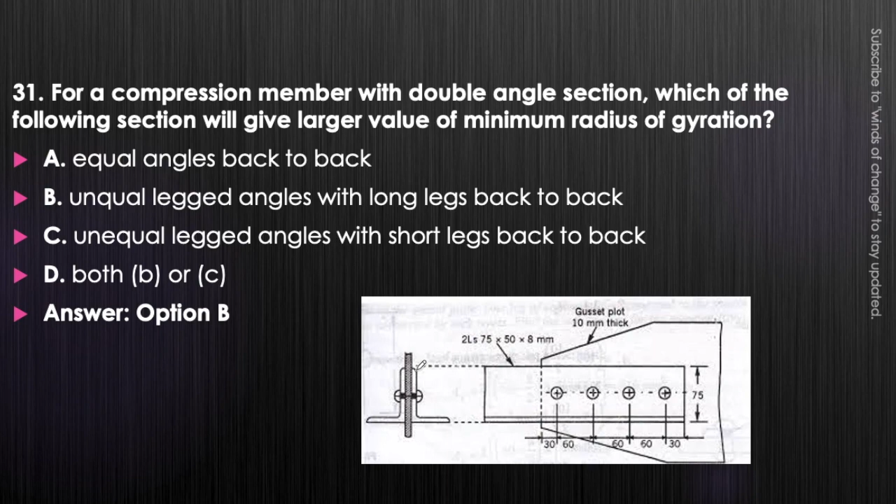The larger value will be obtained for option B, that is unequal legged angle with long legs back to back. The long leg is connected back to back and the shorter leg will be outstanding. So this will produce the larger value of minimum radius of gyration. Radius of gyration is root I by A.

Next question. According to IS specification, the effective length of a column effectively held in position at both ends and restrained in direction at one end is taken as 0.67 L, 0.8 L or 1.5 L. In this condition, one end is effectively held in position as well as restrained in direction. Another end is effectively held in position but not restrained in direction. So the answer will be 0.8 L, that is option B.

These are all the cases. First case, one end is restrained and the other end is free, so that is 2 L. When both ends are effectively held in position but not restrained in direction, it will be L. If one end is effectively held in position and restrained in direction and the other end is like a roller supported condition, then it will be 1.2 L.

In the condition given in the question, both ends are effectively held in position but only one end is restrained in direction, so L effective becomes 0.8 L. When both ends are effectively held in position and restrained in direction, it is given by 0.65 L.

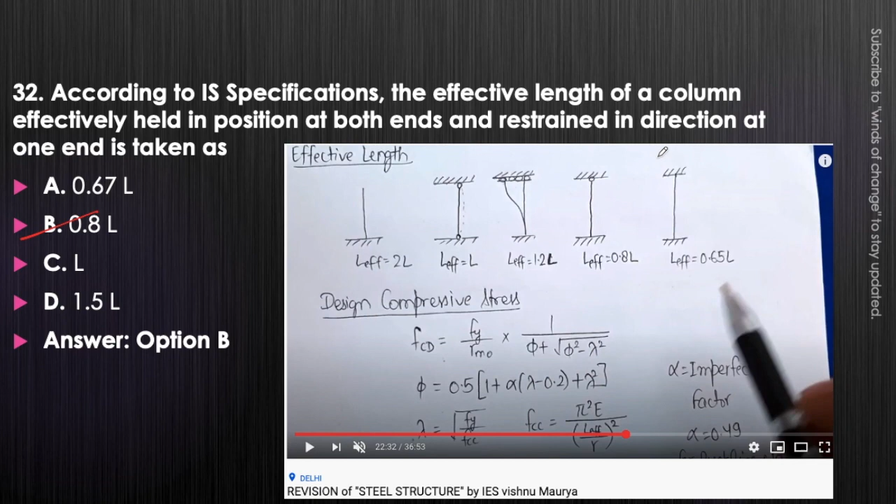Next question. The minimum thickness of the steel plate which is directly exposed to weather and is not accessible for cleaning and repainting should be 4.5 mm, 6 mm, 8 mm or 10 mm. It is directly exposed to weather and not accessible for cleaning and repainting, so we cannot do any treatment after placing it. The minimum thickness should be 8 mm. Option C is the correct answer. Memorize it, it is an important question.

Next question. The elastic strain for steel is about 1 by 12 of the strain at initiation of strain hardening and about 1 by 120 of maximum strain, or 1 by 2 of strain at initiation of strain hardening and about 1 by 12 of the maximum strain, 1 by 12 of the strain at initiation of strain hardening and 1 by 200 of maximum strain, or 1 by 24 of the strain at initiation of strain hardening and about 1 by 200 of the maximum strain. Just think about it.

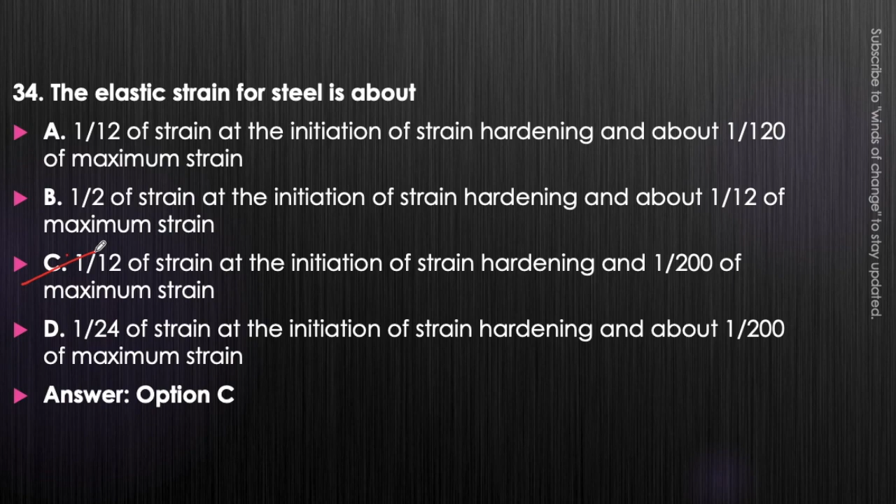The answer will be option C, that is 1 by 12 of the strain at the initiation of strain hardening and 1 by 200 of the maximum strain. This is the elastic strain. This value should be 1 by 12 of the strain at strain hardening. Let's say this is where strain hardening starts and this is the value of maximum strain that will be developed.

So it should be 1 by 12th of this one and 1 by 200th of this one. We are talking about this value of elastic strain. Okay, got the concept here.

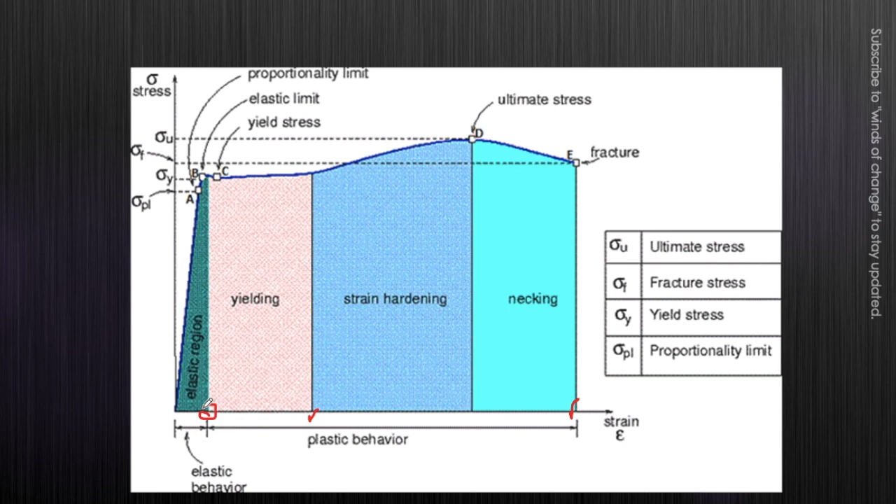Next question. In a gusseted base, when the end of the column is machined for complete bearing on the base plate, then the axial load is assumed to be transferred to the base plate fully by direct bearing, fully through fastening, 50% by direct bearing and 50% through fastening, or 75% by direct bearing and 25% through fastening. Just think about it. We are talking about the gusseted base condition at the end of the column. What will be the answer? Think about it.

Since this is a condition in which the column is machined for complete bearing on the base plate, the axial load is assumed to be transferred to the base plate 50% by direct bearing and 50% through fastening. So answer C will be the correct answer. Okay, in this case 50% load is being transferred by the bearing and 50% by fastening. You can watch here about this condition. This is direct bearing. If this is machined, then 50% load will be transferred directly and 50% by these fastenings.

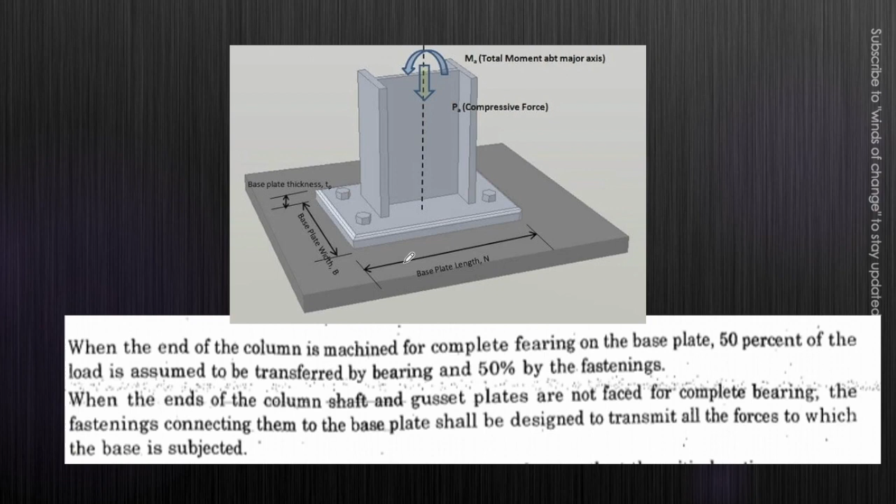Okay, when the ends of the column are machined for complete bearing on the base plate, 50% of the load is assumed to be transferred by bearing, 50% by fastening. Now we will see the other condition also. When the ends of the column shaft and the gusset plate are not faced for complete bearing, the fastenings connecting them to the base plate shall be designed to transmit all the forces to which the base is subjected. If this is not machined, then we will assume that these fastenings will be responsible for taking all the loads.

Next question. Shear buckling of the web in plate girder is prevented by using vertical intermediate stiffener, horizontal stiffener at neutral axis, bearing stiffener, or none of the above. Think about it. How can shear buckling be prevented? Shear buckling will occur in the portion of web only. So the web can be improved by providing vertical intermediate stiffeners. These are the vertical stiffeners which will be provided so that shear buckling cannot occur.

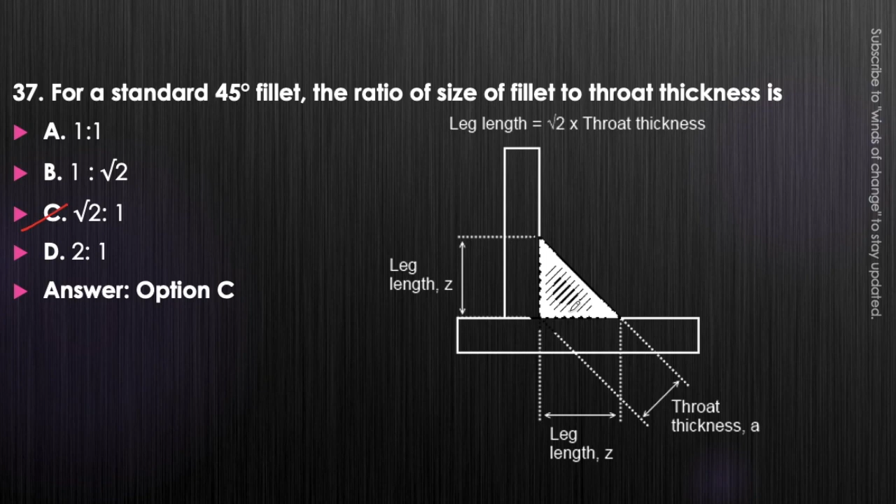Next question. For a standard 45-degree fillet, the ratio of size of fillet to throat thickness is 1:1, 1:√2, √2:1, or 2:1. Just think about it. The size is S and throat thickness is T. So what will the ratio S by T be? It will be option C, that is √2:1. This is the size of the weld, S, and this throat thickness will be T. So S by T will become √2:1. Memorize it, it is very important.

Next question. Shape factor is a property which depends only on the ultimate stress of the material, only on the yield stress of the material, only on the geometry of the section, or both on the yield stress and ultimate stress of the material. Think about it. Shape factor is the ratio of plastic section modulus to elastic section modulus of any section. So it will depend only upon the geometry of the section. That is option C. Memorize it, it is also important.

Next question. If the thickness of the plate to be connected by a rivet is 16 mm, then the suitable size of the rivet as per Unwin's formula will be 16 mm, 20 mm, 24 mm, or 27 mm. Can you recall Unwin's formula? This is a direct formula-based, very easy question. Unwin's formula is given by 6.04 root T, where T is the thickness of the plate. Here T is 16 mm, so root T is 4, and 4 into 6 becomes 24 mm. So option C is correct. Memorize this formula. Next question.

Horizontal stiffener in a plate girder is provided to safeguard against shear buckling of the web plate, compression buckling of the web plate, yielding, or all of the above. We are talking about the horizontal stiffener. Why do we provide the horizontal stiffener in a plate girder? What is the purpose of it?

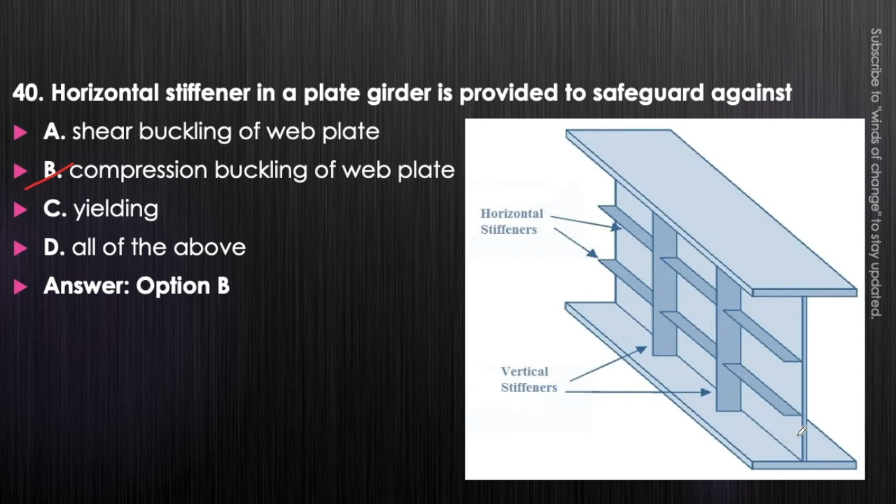The answer will be option B, that is compression buckling of the web plate. These are the horizontal stiffeners. Okay, so these are being provided so that this web plate should not fail in compression buckling. Okay, and in the case of the vertical stiffener, why do we provide it? To prevent the web from buckling. Okay, so both of these stiffeners are important.

Next question, maximum slenderness ratio of a steel column, the design of which is governed by wind or seismic forces, is. We are talking about the maximum slenderness ratio of a steel column in case of wind or seismic force. 150, 180, 250 or 350. Just think about it. The answer will be option C, that is 250.

We have explained this in the starting of the video of steel structure revision. You can watch this video from the link in the description box and memorize these values. These values are very important. Okay, for different conditions, what will be the value of the slenderness ratio? Like in the question, it is being asked about compression force from wind load or earthquake load. So the value of slenderness ratio will be 250.

Okay. Next question, the slenderness ratio for a lacing bar should not exceed. This is a very important question. In case of the lacing bar, the slenderness ratio should not exceed 100, 120, 145 or 180. Just think about it. Can you recall the design of lacing bar in your mind? In that one, the slenderness ratio, that is KL/r, should not exceed 145. Option C will be the correct answer.

We have explained this also in the same video of revision of steel structure, that KL/r value of lacing bar should not exceed 145, where r is t/√12. Okay, t is the thickness of the plate, that is the lacing plate.

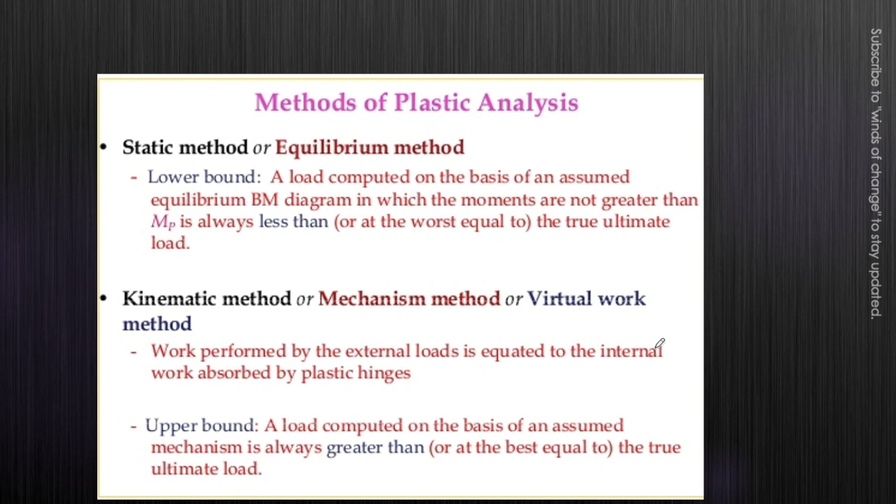So memorize it, these are important, and you can watch this by pausing this video. I'm moving further. Next question.

The range of the economical spacing of the trusses varies from L/3 to L/5, L/4 to 2L/5, L/3 to L/2, or 2L/5 to 3L/5, where L is the span. Here we are talking about the range of economical spacing of truss. The spacing of the truss will vary as in option A, that is L/3 to L/5. This we just have to memorize, nothing else.

Next question. The steel beam supporting loads from the floor slab as well as from the wall is termed as stringer beam, lintel beam, spandrel beam, or header beam. The question is saying that the beam is supporting load from both. First of all, it is supporting load from the floor slab, and it is also supporting load from the wall that will be above it. These beams are called spandrel beams. That is, option C will be the correct answer.

Okay. Next question. In moment resistance connections, the moment resistance of the riveted connection depends upon shear in rivet, compression in rivet, tension in rivet, or strength of rivet in bearing. Here we are talking about the moment resistance of a riveted connection. Which one will be the correct answer? Just think about it. It will be dependent upon tension in the rivet. Option C will be the correct answer. The moment resistance of a riveted connection depends upon the tension in the rivet.

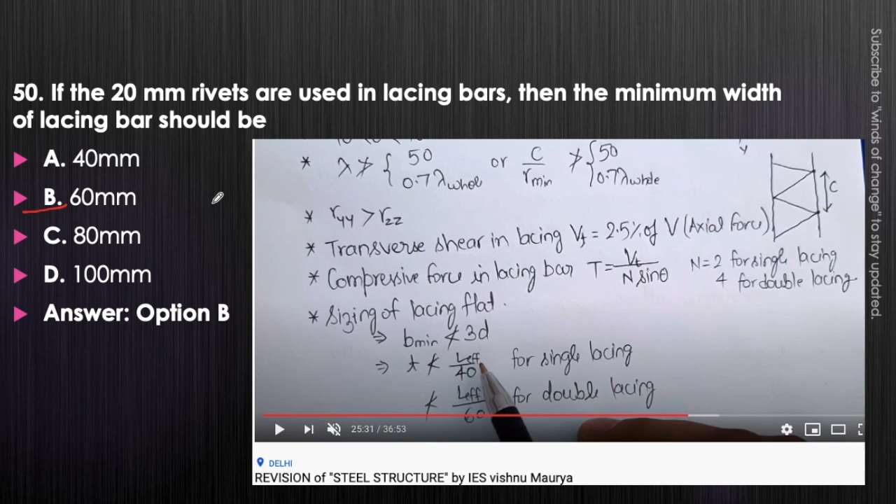Next question. Steel tanks are mainly designed for weight of tank, wind pressure, water pressure, or earthquake forces. This is a very easy question. Steel tanks are used for storing water, and mainly the force acting on its wall will be water pressure. That is, option C will be the correct answer.

Okay. Next question. The shape factor of an isosceles triangle for bending about the axis parallel to the base is 1.5, 1.7, 2.0, or 2.34. For an isosceles triangle, under the condition given here, this is the maximum value that can be obtained for the shape factor. So the answer will be 2.34, that is option D. It can be obtained from here. You can watch this. ZP equal to A/2 (YC plus YT), from the compression and tension side. So it will be computed from the equal area axis. The answer will become 2.346.

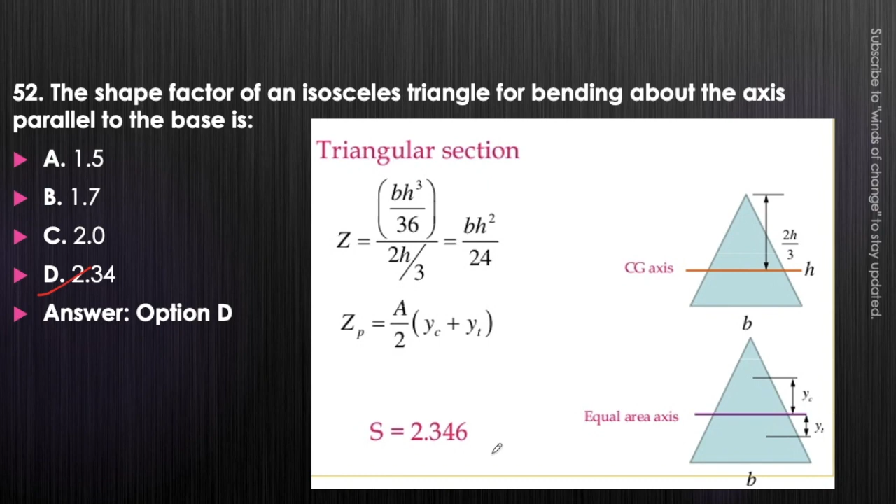Next question. Which of the following conditions is to be satisfied both in elastic and plastic analysis? Equilibrium condition, yield condition, plastic moment condition, or mechanism condition? Think about it. Very easy question. Yield condition occurs only in the elastic analysis. Plastic moment condition occurs only in the plastic analysis, and mechanism condition also occurs only in the plastic analysis. So the only condition occurring in both plastic and elastic analysis will be the equilibrium condition. So option A will be the correct answer.

Next question. Bending, compressive, and tensile stresses respectively are calculated based on net area, gross area and net area, gross area in both the cases, or net area in both the cases. If we calculate bending, compressive, and tensile stress, which area will be taken? Think about it. Very easy question. In case of bending and compressive stresses, we take gross area in the calculation, while in case of tensile stresses, we take net area. So option B will be the correct answer.

Okay. Next question. In the cross section of a weld, throat is the minimum dimension, average dimension, maximum dimension, or none of the above. In the cross section of the weld, what will be the throat?

Think about it. The throat thickness is that size of the weld which is responsible if the weld can carry minimum stress in it. So it will be responsible for minimum dimension. So option A will be the correct answer. Throat thickness or effective throat is the minimum dimension of the cross section of the weld.

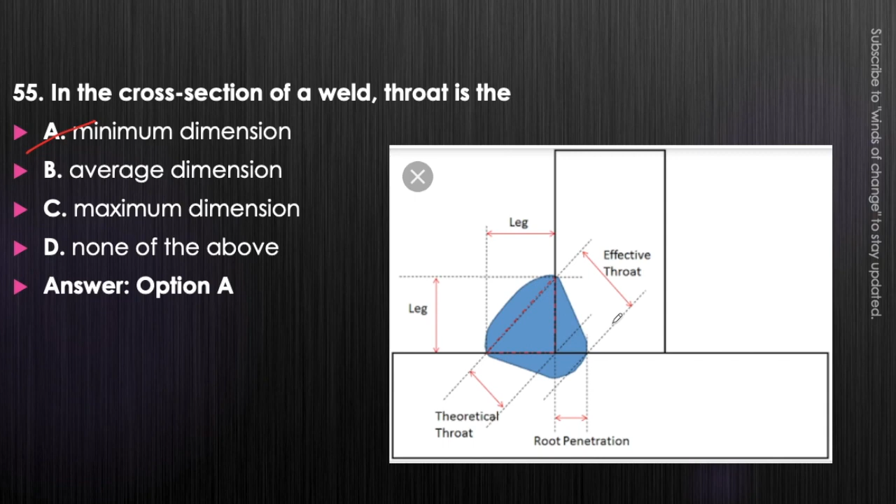Okay. Next question. For rivets in tension with countersunk heads, the tensile value shall be reduced by 25%, reduced by 33.3%, increased by 25% or increased by 33.3%. Here we are talking about the condition of the countersunk heads. In case of countersunk heads, the tensile value will be reduced by or increased by what amount?

Just think about it. It will be option B, that is it will be reduced by 33.3%. This is the condition of the countersunk angle of the rivet. Okay, this is the shank diameter, this is countersunk part, and in this case the tensile value shall be reduced by 33.3%.

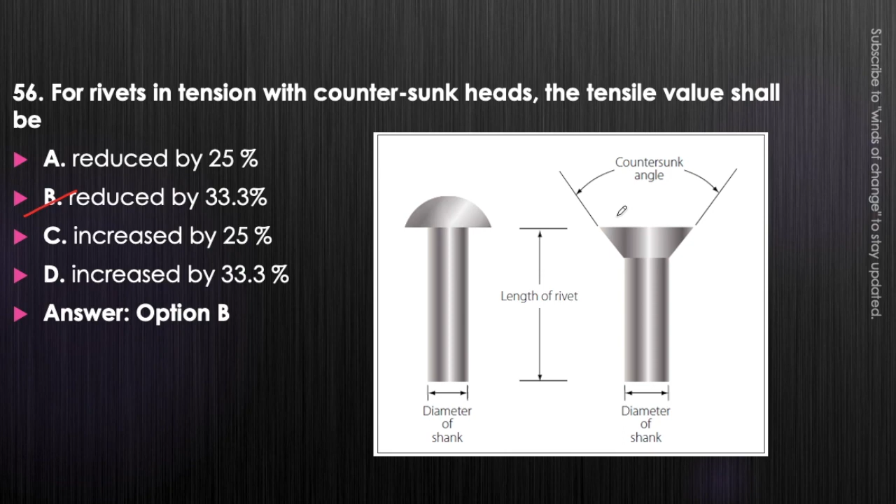Next question. Load factor is always equal to factor of safety, always less than factor of safety, always greater than factor of safety, or sometimes greater than factor of safety. So we are comparing between load factor and factor of safety in this question. What will be the answer? Just think about it. Load factor is always greater than factor of safety.

Okay, first of all, what will be the factor of safety? It is the yield load upon working load, or yield stress upon working stress. If we take the condition of rectangular section, this working stress will be sigma y upon 1.5, so this value, factor of safety, will be around 1.5. And one thing which should be memorized here, that in the elastic analysis factor of safety is taken, while in the plastic analysis load factor is taken.

Okay, what is load factor? It is the collapse load upon working load. So for rectangular section, its value can be obtained as 2.25. Okay, so here we can see the result that load factor is more than factor of safety. But in general, if we go for any of the section, any particular condition, then we will always come to a result that load factor is always greater than factor of safety.

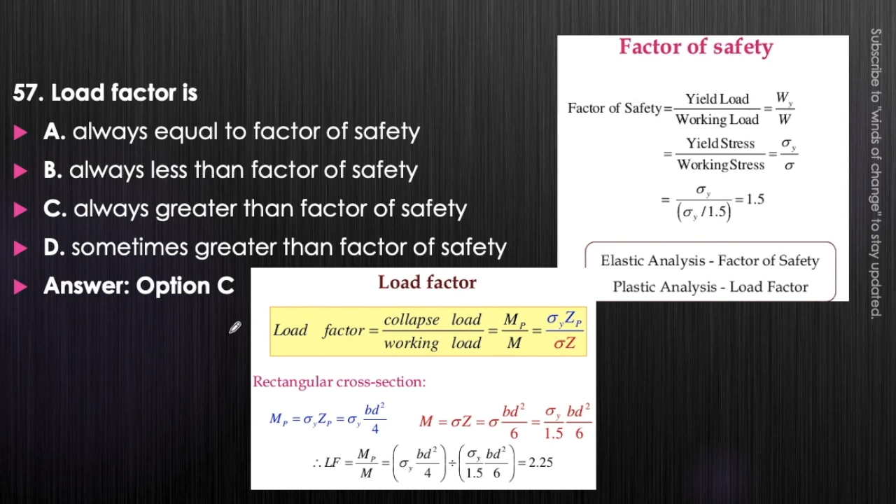Okay, next question. Lug angles. Lug angles are used to reduce the length of connection, or are unequal angles, or increases shear lag, or all of the above. Just think about it. Why we use lug angles? The answer will be option A, that is these are used to reduce the length of connection.

Lug angles are like this. Let's say this is the main angle. So through this we connect a lug angle. Okay, it will be connected to this outstand flange also, as well as to the base gusset plate also. Okay, so now it will do the purpose of reducing the shear lag effect that will be generated in the outstanding flange.

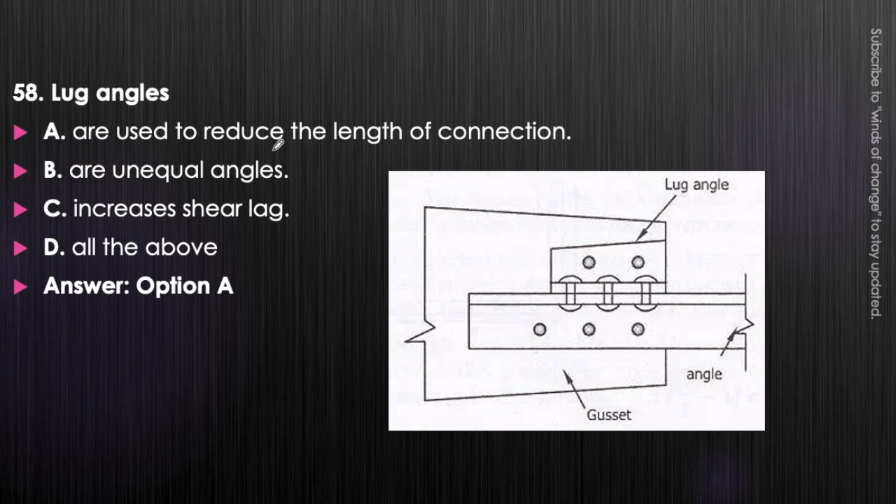Okay, and it is not necessary that these are unequal angles. These can be equal or unequal angles. Usually equal angles are taken, and these are used to reduce the length of connection. Okay, so option A will be the correct answer.

Next question. The effective length of the battened column is increased by 5%, 10%, 15%, or 20%. What will be the answer? Very easy question. The effective length of battened column will increase by 10%. That is option B will be correct answer, because lambda effective is 1.1 times of lambda actual.

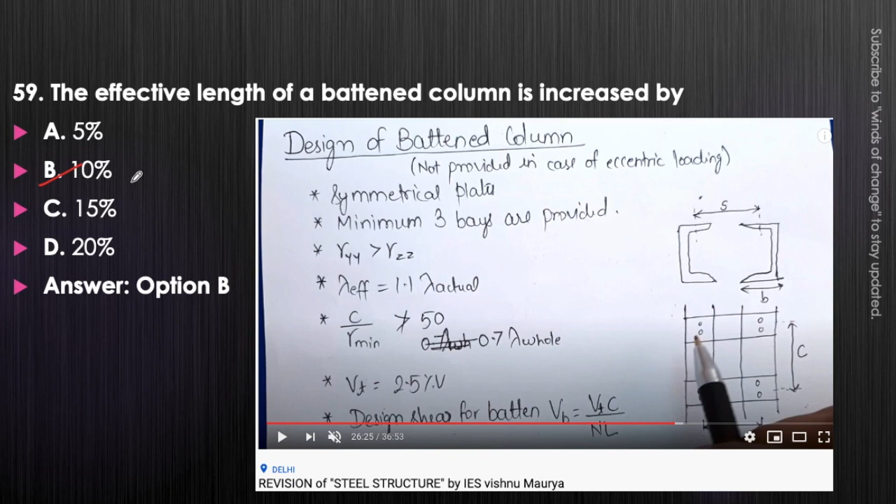Okay, in case of lacing column, the effective length is increased by what percent? It is increased by 5% in case of the lacing column. Okay, and in the battened column it is increased by 10%. Memorize this. Whatever I am saying, this is very important. Keep it in your mind.

So here we will finish the 60th question of this video, and in the next video we will come up with question number 61 to 80, that is 20 questions.